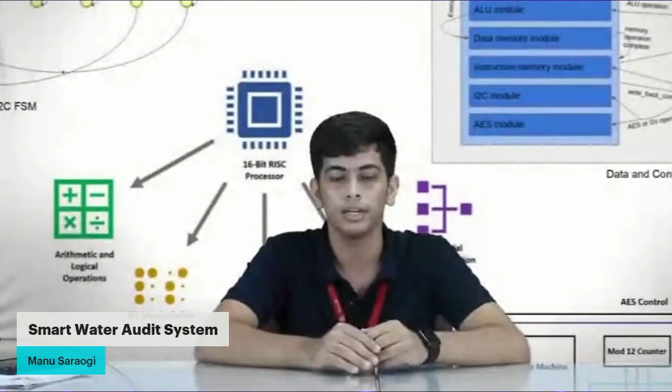The address of the slave which it wants to communicate with is sent on the SDA line, and the corresponding slave responds back with an acknowledgement bit. Once this is done, the read or write bit is sensed, and corresponding operation is performed by the master in cycles of 1 byte each. Once this is done, there's a stop condition also indicated by the master by pulling the SDA line high when the SCL is active, and this ends the communication.

With the advancements in IoT and artificial intelligence, smart cities is becoming a future. We, the team, have taken down the idea of water system distribution in a smart city.

In recent days, the audit system has been completely manual. We have certain pipelines laid down across the city, and detecting the pilferages or leakages is very tough since there's no proper communication between two different pipelines, as in where the leakage or pilferage is happening. Water being an important resource is something that needs to be conserved. So with this, we have set up a smart water audit system using IoT.

We have used four platforms for this: one being the ThingSpeak Cloud, other being the MIT App Inventor, wherein we could develop an app for the users to use. Then we have Firebase, which stores a database of all the users. And we have the Arduino IDE, through which we program our microcontrollers.

Coming to our block diagram, basically in a city we have a main water tank which supplies the entire city. The main water tank is connected to various houses via pipelines. We have equipped each pipeline with water flow sensors and a solenoid valve. Whenever the user needs a particular amount of water, he uses the app, enters the amount of water he requires, pays for that particular water, and then this data goes to the cloud.

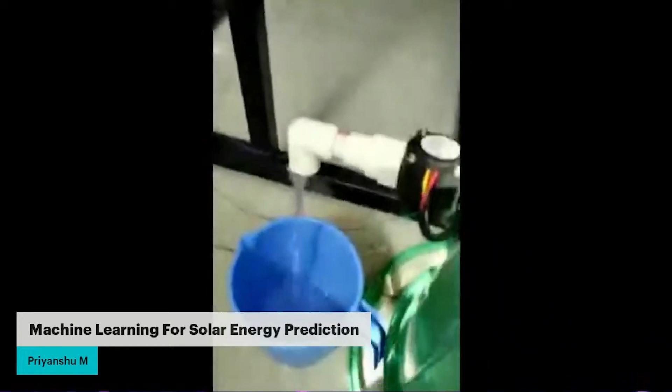As the water flows, the water flow meter present in the home tank and the main tank keeps recording the amount of water that's flowing and passes on the data to the cloud. Here we are seeing the concurrent data getting filled up at the home tank, and here we see the data being released from the main tank.

Once the amount requested reaches, the solenoid valve at the main tank and the home tank stops. So we have received around 620 ml of water.

As shown in the cloud, at the home tank we have received around 0.624 liters of water, and from the main tank, around 0.733 liters has come out. The difference in the water between the main tank and the home tank is due to the leakage between the pipes and the water that is still remaining in the pipeline. Thank you.

That was a lovely explanation, Priyanshu. I have a couple of questions for you. Am I audible?

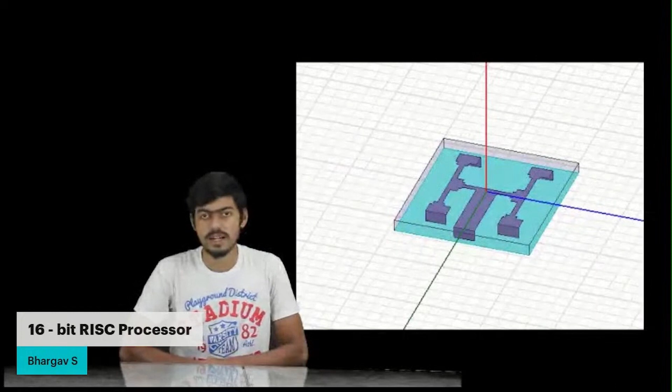So that was an introduction about the idea behind my startup, basically wireless power transmission. I've developed various antennas, phased arrays, and microstrip phased arrays for various different frequencies, mainly focusing on 2.4 gigahertz. I've also developed various rectenna circuits for microwave frequencies. The basic idea is to transmit electromagnetic waves and convert them to electricity. That's the basics of the project we've been working on for a few months now. Thank you.

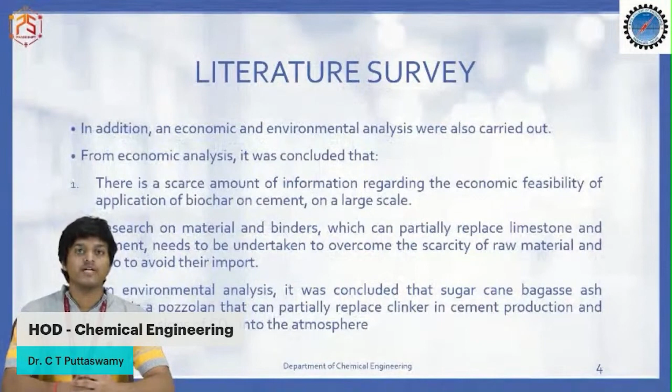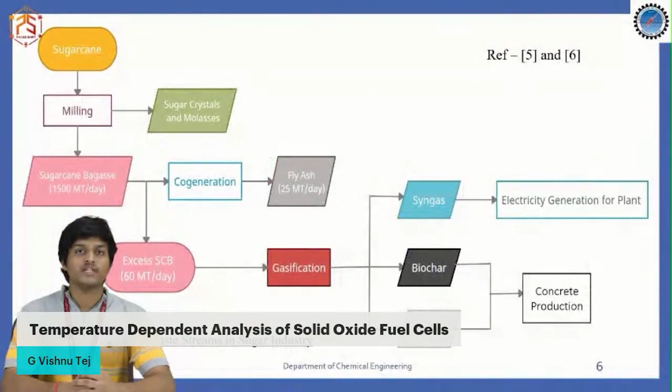Concrete is one of the most extensively used materials worldwide, but has a major negative impact due to the emission of carbon dioxide. Availability of surplus agro residues like sugarcane bagasse can be converted to biochar, which can be used as a concrete filler. This reduces the emission of carbon dioxide with less use of cement, and it also increases the quality by hydration and microstructure.

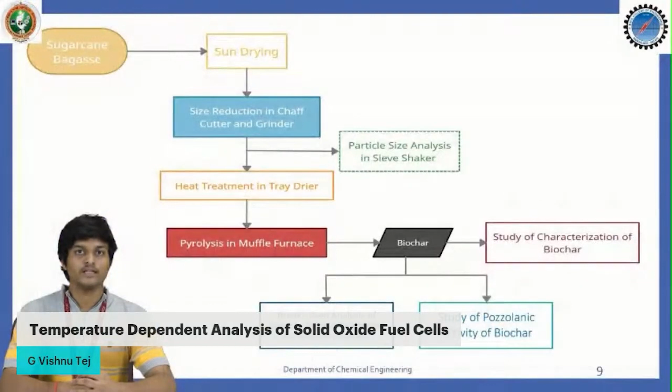The aim is to study the applicability of carbonized sugarcane bagasse in reinforced concrete. The objective is to prepare carbonized sugarcane bagasse and to study the characterization and pozzolanic activity of the biochar, and to perform the break-even analysis of sugarcane bagasse blended with concrete.

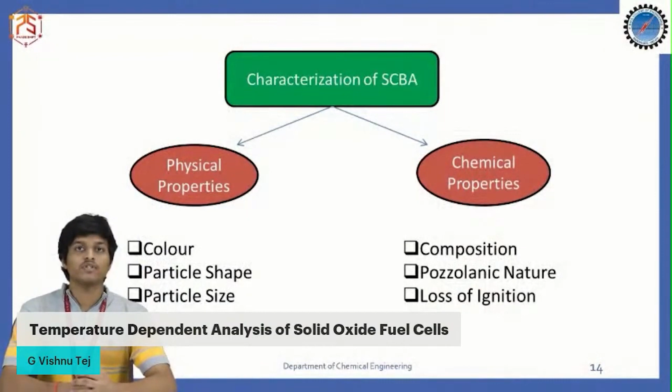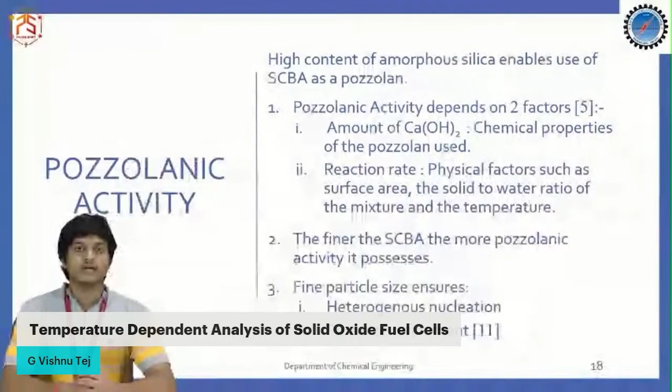The materials required are chaff cutter, grinder, hot air oven, muffle furnace, and sugarcane bagasse. The sugarcane bagasse is pre-treated before being sent to the muffle furnace. The pyrolysis takes place in the muffle furnace to produce the biochar. Simultaneously, the characterization and pozzolanic activity study of the biochar is held, and the biochar is mixed with reinforced concrete to study the break-even analysis.

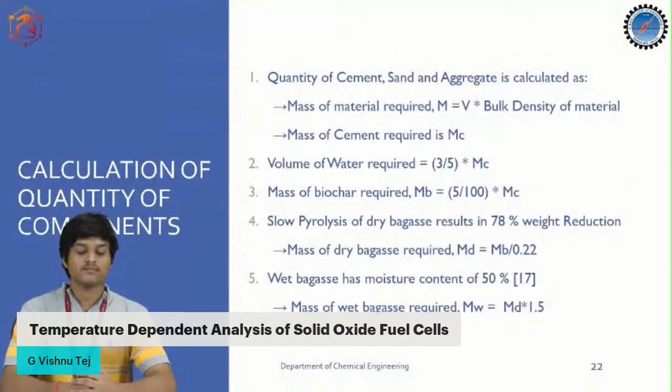The market price of M20 grade concrete is rupees 3,800 per meter cube. The operational cost is 30% of the total cost. The fixed capital cost is the sum of cost of mixing and the operational cost, which is again 30% of the total cost. The variable cost is the sum of purchase cost of cement, brick material, and filler material, plus the cost of biochar production.

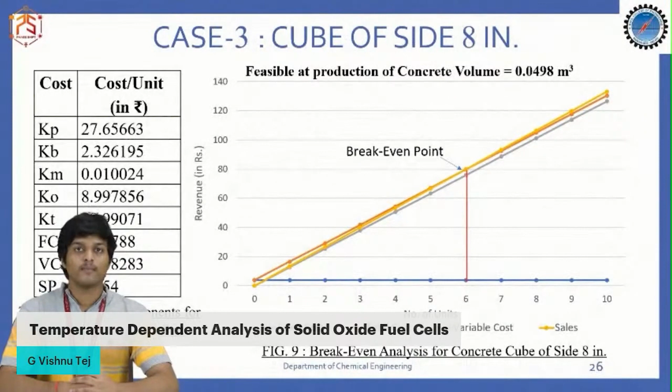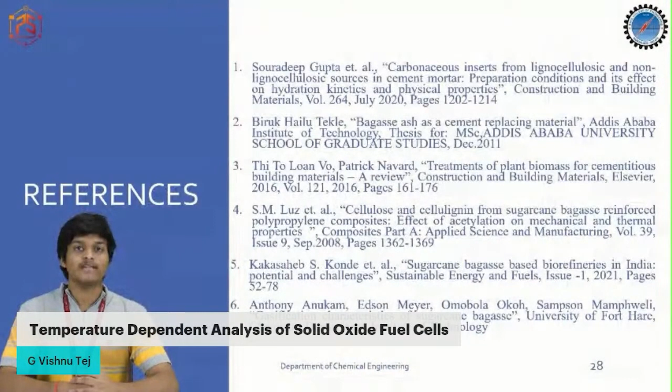In conclusion, necessary testing was done at a laboratory scale to obtain the biochar. Detailed study was carried out to show the bagasse char is suitable for concrete production. Bagasse is a class F pozzolan due to high silica content. Sugarcane has a high proportion of cellulose, hemicellulose, and lignin that influences the production of biochar. The break-even analysis was carried out to show economic feasibility of the process. Thank you.

Going on, thank you so much, that was a lovely explanation. We have Vishnu here who will be answering a few questions. Hi Vishnu, am I audible? Yeah, I can hear you. Can you hear me? Yes, I can.

So, any project that is done, we all know that we experience some kind of obstacles or failures as we are doing it. What would you say was the biggest obstacle you had to overcome as you were doing this project?

So, as our project involves solid oxide fuel cells, which is currently a developing technology, being students, we faced certain challenges in acquiring the software and doing literature survey because very little research has been done currently. The idea we had was to do temperature analysis, and very little research has been done in that particular aspect. So doing the literature survey, getting the relevant material, and acquiring the software were some of the major challenges we had. And then, of course, to analyze where we went wrong because it was a first-time project, introduced in the fifth semester for us. So those kinds of challenges we faced.

And how effectively do you think you overcame these challenges, and how did BMS help you do this? Yeah, so we are actually grateful to the chemical engineering curriculum for including mini projects into our scheme, because it was in our curriculum to do these kinds of projects, so we could make time to go ahead with it. We are really grateful to Dr. Samita Mehta ma'am for guiding us throughout the project, letting us know where we were going wrong and what could be done better. So because of implementation of this particular project in our scheme, we were able to do it better in the end.

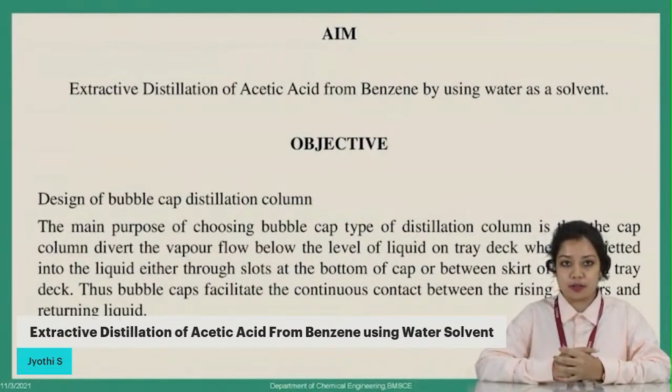Our flow sheet includes a mixer, two distillation columns, and a cooling tower. In the mixer, recycled solvent and fresh solvent are mixed, and along with it the feed mixture, which includes benzene and acetic acid, is sent to a distillation column.

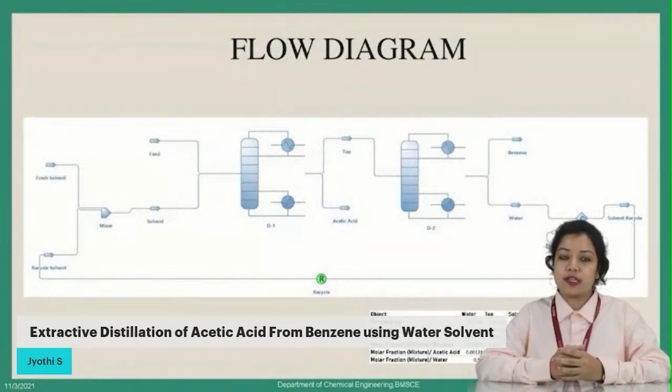The distillation column is equipment used to separate a mixture based on differences in relative volatility. Distillation columns have provisions for feed entry and removal of the top and bottom products. The section above the feed entry is called the enriching section, and the section below is called the stripping section.

Inside the tower there are a number of trays. There is a downcomer so that liquid flows from one tray to another, and a weir to hold the liquid at a certain height.

The feed, which is acetic acid and benzene mixture, when sent with water, has its relative volatility changed, so that the top product obtained is benzene and water, and the bottom product is acetic acid, which is removed from the bottom.

In this distillation column design, we made use of the McCabe-Thiele method to find the number of stages. The conventional method uses a handmade complicated graph, so to avoid such complications, we developed a method using an Excel sheet.

First, we draw a graph of mole fraction of the feed in the liquid phase versus the mole fraction in the vapor phase. We draw a 45-degree line as the operating line for total reflux, then an equilibrium curve using VLE data for the acetic acid and benzene mixture, obtained from the Perry's handbook.

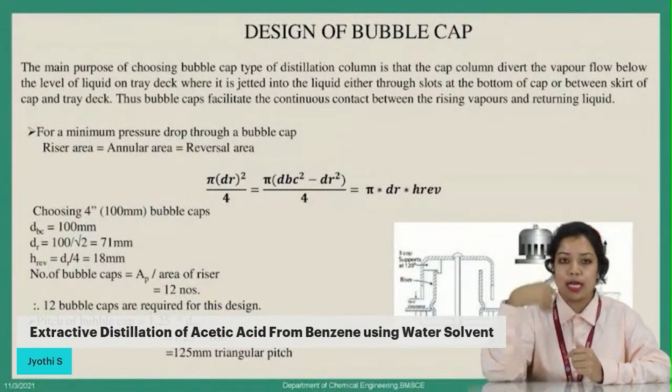From the second distillation column, the top product obtained is benzene, and the bottom product is water. In order to not waste the solvent, the water has to be recycled, and it is cooled using a cooling tower.

The water coming out of the distillation column is at a temperature of about 45 degrees Celsius, and we decide to cool it to 30 degrees Celsius. We employ a cooling tower for this.

The cooling tower is equipment used to reduce the temperature of water by countercurrent operation with air through the tower, packed with wooden slats. The air has a dry bulb temperature of 31 degrees Celsius and a wet bulb temperature of 22 degrees Celsius.

Hot water is sprayed from the top of the cooling tower using a distribution system, while air is passed countercurrently from the bottom. Since the density of air is much less than that of the incoming water, mass transfer takes place between the air and water, so the water rejects its heat to the air and is collected from the bottom.

The air, having become hot, is cooled to a lower temperature by employing a number of fans in the cooling tower, and then rejected to the atmosphere.

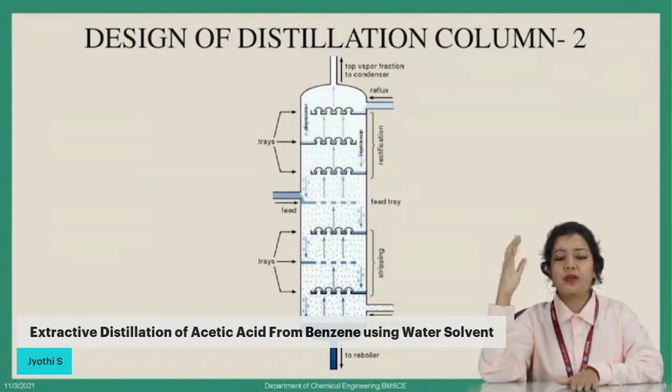Now, in order to find the dry air flow rate to be used and the packing height of the wooden slats, we make use of the graph of enthalpy versus temperature. Since the cooling temperature is 30, we draw a graph of temperature swinging between 25 to 45 with their respective enthalpies, formulated using psychrometric charts, so that we get an equilibrium curve.

We mark a point called Q at 30 degrees Celsius with its respective enthalpy and draw a tangent to the curve. The slope of the tangent will be equal to LC by G, where L is the liquid flow rate with which the water is coming, and C is the heat capacity of water, that is 4.187 kilojoule per kg Kelvin.

G is the minimum gas flow rate to be used. From this formula, we get the minimum air flow rate to be used, and the operating flow rate must be equal to 1.4 times the minimum.

Now, in order to find the height of packing, we make use of another point called P, marked on the tangent line Q, so that the tangent gets shifted away from the equilibrium curve, giving the operating line PQ and the equilibrium curve. We need to draw the tie lines between these two curves.

The slope of the tie lines is obtained by the formula slope equals h by k, where h is the heat transfer coefficient and k is the overall gas mass transfer coefficient. Since both h and k are known, the slope of the tie lines is obtained; it is equal to minus 11.4.

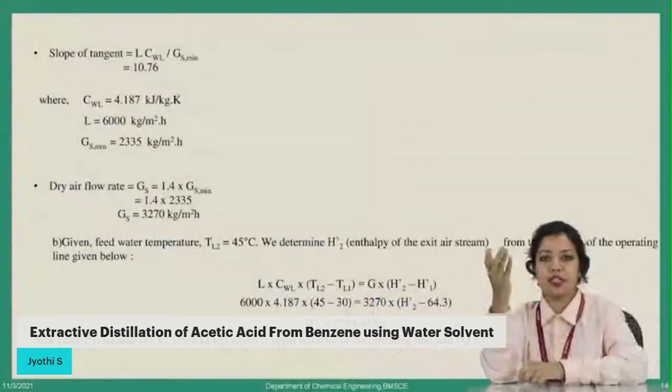And the two distillation columns which we have employed, the diameter comes around 1 meter and height comes around 3.5 to 3.8 meters, so that the design condition, that is h by d ratio must be equal to 4, is satisfied. So the design of the distillation column is satisfied, and the cooling tower design is also fulfilled.

So this is all about the simulation of the entire extractive distillation of acetic acid from benzene using water as a solvent.

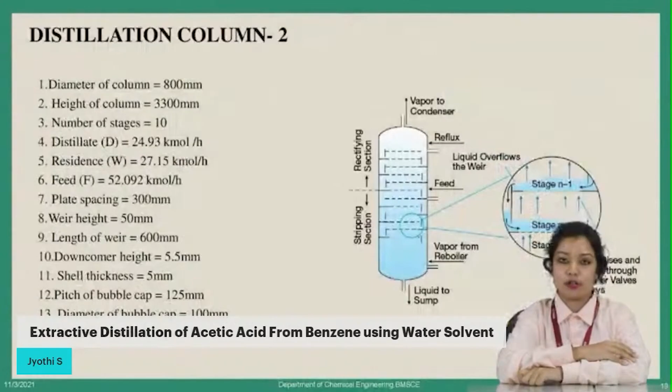That was a really, really informative project. I think we have Jyothi's teammate Rakshita over here who will be answering the questions. Am I audible?

Yes ma'am, you're audible. So as you know, chemical engineering is an extensive field, and it has a lot of elements to it. How would you help your juniors who would want to go into this field or do something similar to this?

Chemical engineering is a unique field in which we learn about the production of different kinds of chemicals, manufacturing, and also about the design of equipment. For my juniors, regarding our project, I would like to guide them about the simulation software which we used in our project.

DWSim is the software which we used, through which we can build the unit operations and solve the problem in an easy way. It is not possible for us to conduct all the chemical engineering experiments in reality.

Using simulation, the problem can be solved through computer or software when we put a set of scientific equations and get a workable solution. It is a great software through which we can solve problems.

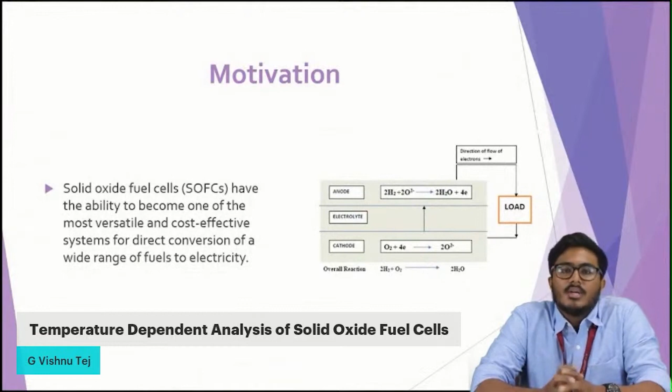Now I'd like to speak about our simulation part. To begin with, we created a 2D object in our ANSYS SpaceClaim software and extruded it to 3D.

Then we aim at transferring this CAD file to COMSOL Multiphysics software, wherein we do our entire simulation. Here we take this CAD file and assign the probe boundary conditions to it.

The probe boundary conditions include assigning the anode probe boundary conditions for hydrogen as fuel, the probe boundary conditions for oxygen as the other fuel, and proceeding with water formation at the end of the electrochemical reaction. The hydrogen-water probe boundary condition is assigned at the anode.

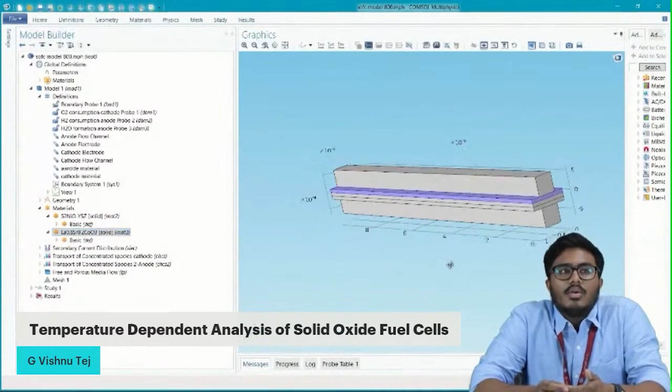Following this, after assigning the probe boundary conditions, we select the materials required for our study. We select nickel oxide based cermet as anode material, yttria stabilized zirconia for the electrolyte, and lanthanum strontium cobalt ferrite for the cathode. The choice of these materials was driven by our literature survey performed before.

After selecting the materials, we proceed with selecting the physics for modeling our simulation. It consists of three particular physics to be chosen. The secondary current distribution physics involves selecting the Butler-Volmer equations for charge transfer kinetic modeling in the anode, cathode, and electrolyte, because that's the most fundamental equation for modeling the same.

Then we go ahead with the transport of concentrated species, which involves the use of Maxwell-Stefan diffusion equations for modeling the flow of these species in the respective electrodes and the electrolyte.

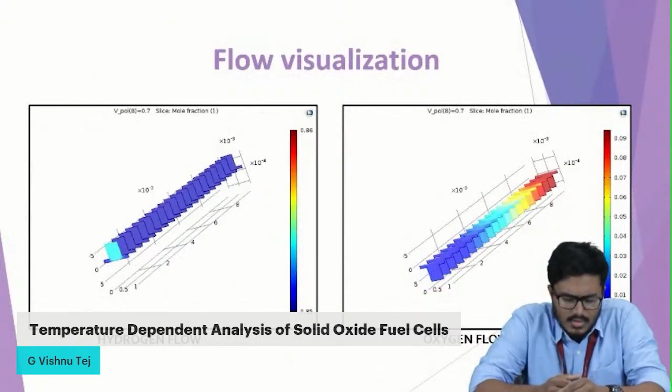Then we go for... wait one sec. Okay, so we first select the transport of concentrated species physics, wherein we are modeling the same.

We try to model the pressure fields and velocity fields in the electrodes and electrolytes using the Navier-Stokes equations and the Brinkman equations. Then the flow of the concentrated species in the electrodes and electrolytes is modeled by means of the Maxwell-Stefan diffusion equation.

After these physics are selected, we aim at meshing our model, which is normal meshing done here for finite element analysis to obtain the results.

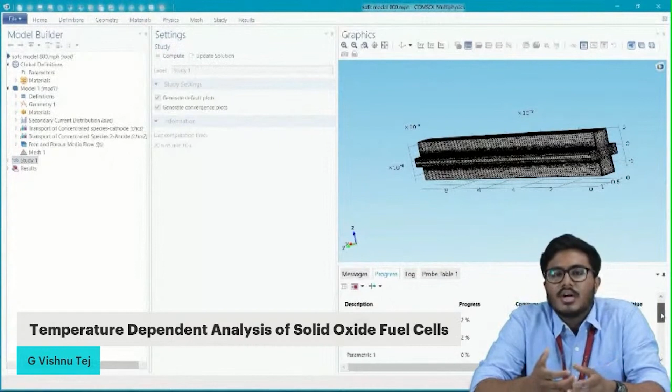After meshing has been done, we go to the study mode, wherein the computer requires setting certain parameters. Majority of the parameters are set based on the literature survey, with temperature being the only variable parameter for our studies, which will be shown later in the results section.

After these parameters have been set up for the study mode, the simulation is started. As you can see here, the simulation is being run. It takes some time to occur, and after a period of time, the results are obtained.

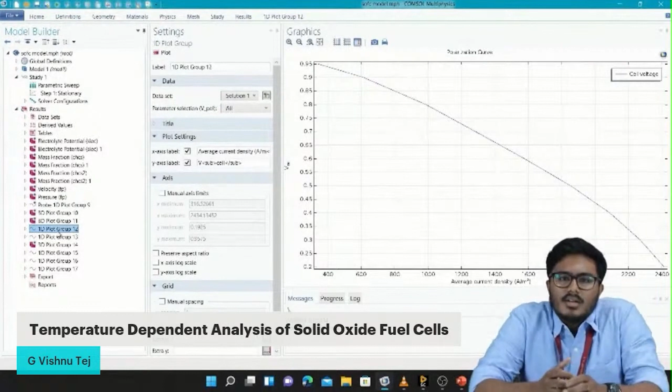Under results, we will bifurcate them into two segments: one which talks about the polarization characteristics, and the other which talks about the power characteristics. First, I'll speak about the polarization characteristics.

There are four curves obtained, at 500, 800, 1000, and 1200 degrees centigrade. We can see that as you increase the operating temperature of the SOFC, the performance increases, in that the polarization voltage required for operation is lower at higher temperature. Next, we'll talk about the power characteristics.

I'd like to conclude that throughout our simulation studies, we found that overall performance of the SOFC increases with increase in temperature. As a further study, we could also be interested in trying different materials out so that we can work on bringing down the operating temperature of the SOFC. Thank you.

Thank you, Vishnu, for the project presentation. I think we have Vishnu here. Yeah, am I audible? Yeah, yeah. Okay, thank you. So I have two questions for you. The first one is, what was your motivation, or what did you think before starting this project?

As we can see, currently the entire focus is shifting from exhaustion of fossil fuels to getting a more sustainable alternative. Even the recent coal crisis of India points towards the same. Keeping these things in mind, we thought the future is renewables, and solid oxide fuel cells are one of the most versatile fuel cells because they can take in a wide variety of fuels and convert them into energy, making them an even better alternative to current energy demands.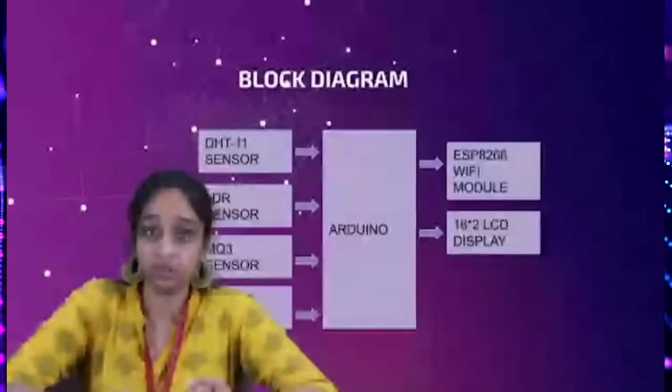Our project is food quality detection and monitoring. More than 50% of the food gets thrown away to landfills because of wastage or improper maintenance. To stop this and also to stop hunger, we've engineered and designed this system. This can be implemented in airplanes while exporting food, in warehouses, storages, and also in malls to extend the shelf life of the food.

Basically, we've used three main sensors to detect the food quality: the DHT11 sensor, MQ3 sensor, and LDR sensor. DHT11 is a temperature and humidity sensor, MQ3 sensor detects foul gases from ethanol and alcoholic smells, and LDR is a light sensor that detects ambient light.

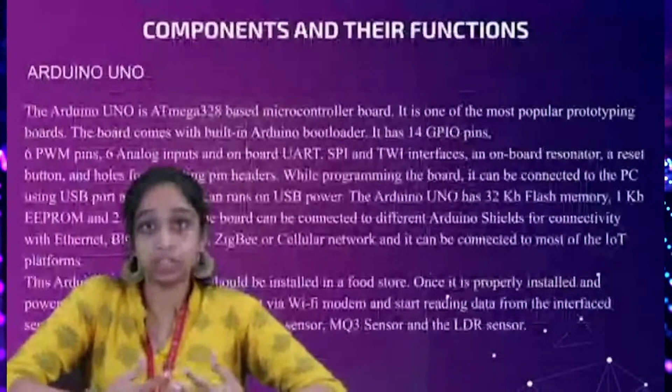This food quality detection system will help in detecting if the food is spoiled or not, and will also help us in monitoring the environment. For example, when there is a rotten apple along with good apples in a basket, the MQ3 sensor detects the smell and shows the food is spoiled. We get a message saying abnormal smell, and we can remove that one apple instead of letting all the apples get spoiled.

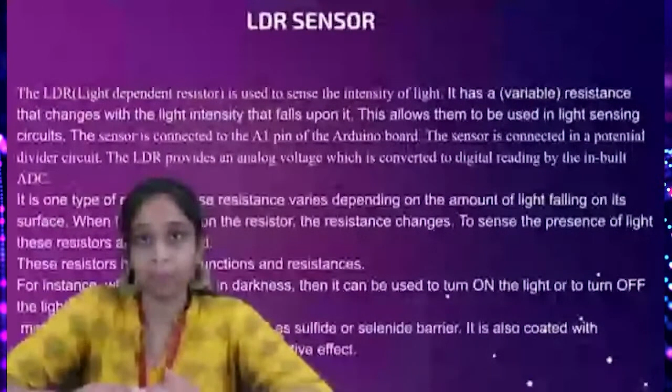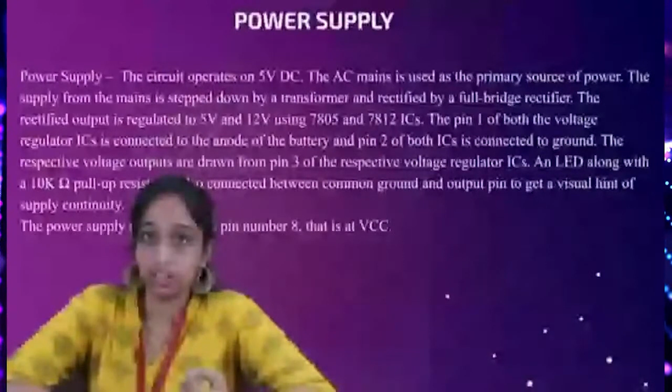Similarly, we have other parameters also, such as light. When there is abnormal lighting, that is when light is out of the range specified by us, or also the temperature and humidity is out of range of the system, it will help us monitor the environment by increasing the temperature or decreasing the lighting. If there is too much lighting in the environment, the chances of food getting overripe also increases.

We have used an IoT setup. For the software part, we have used Arduino, and we have programmed using C programming in the Arduino. We have also used IoT with ThingSpeak. Then our food quality system detects...

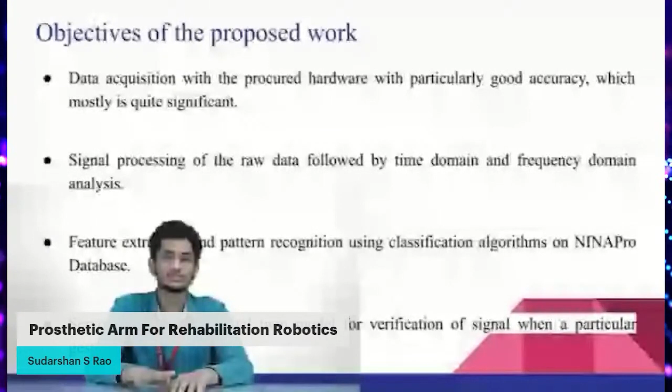The scope of our project is to provide a cost-effective prosthetic arm to all amputees. We verified an existing system called Skull Arm, developed by a Hyderabad institute, which is a lightweight 3D printed bionic arm. It cost around 35 lakh rupees.

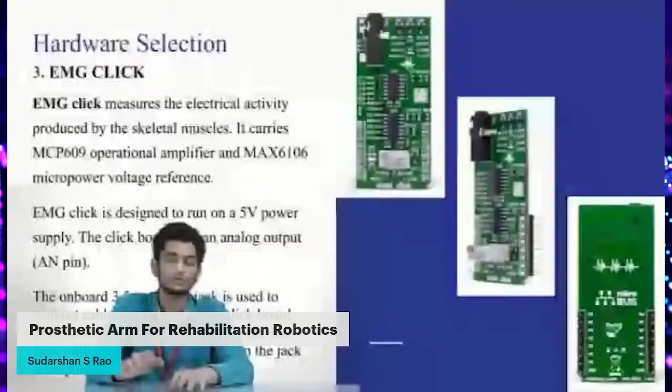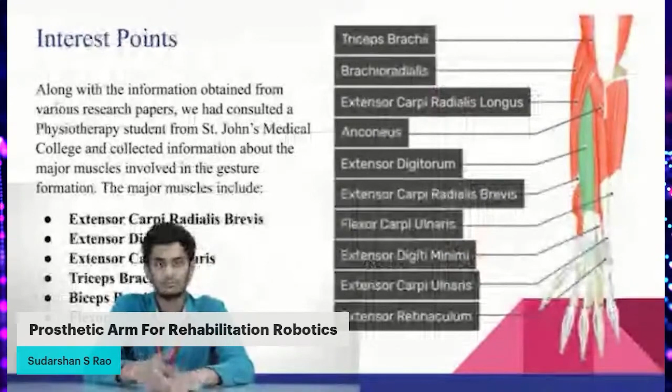So if we wanted to create a cost-effective solution for this, we aimed at replicating the same results provided by the Hyderabad bionic arm. Coming to the hardware implementation, first we analyzed an online repository to figure out what kind of data we are dealing with, because we are working with a human hand, where safety is the imperative factor in the system.

We took the data from an online repository and applied a lot of classification algorithms on RStudio. We got 91% accuracy with KNN, that is K nearest neighbors algorithm. We also used K-means, but received only 89% accuracy. Although K-means was faster than KNN since our dataset was small, we got better accuracy with KNN, so we used the KNN classification algorithm.

Later, we realized that data exists in both time domain and frequency domain. Coming to the servo motors part, we attached several electrodes on the right arm. The electrodes are basically used for EMG, that is electromyography. Electromyography basically produces a waveform when there is a movement in the hand's muscle.

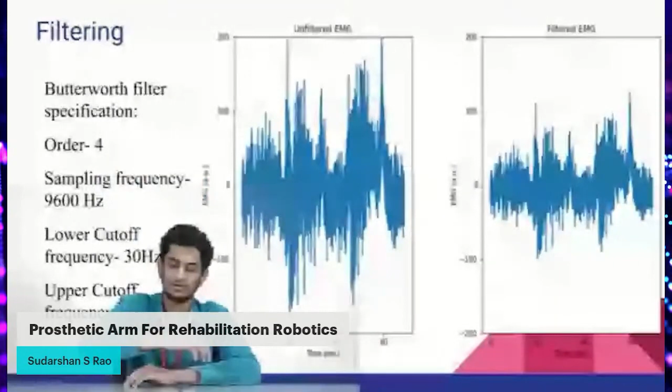We also used the EMG clip. The EMG clip is basically used for signal conditioning. It had two RC filters to remove any noise from the signals, and it also had an amplifier to amplify the signal, because the output of any EMG will be in millivolts. We had to amplify it to volts.

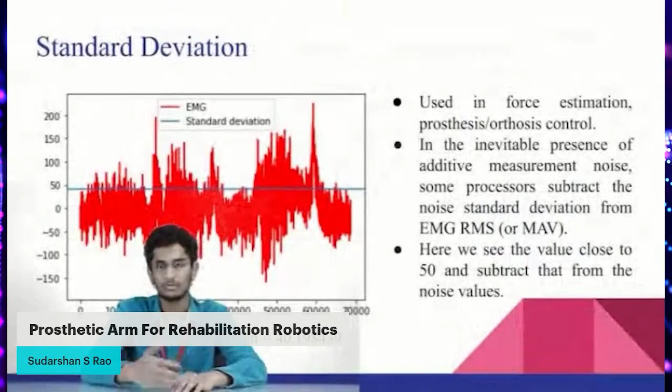After amplification, we passed it to a comparator, where the comparator compared the dataset to a threshold value, so that we reject all the unnecessary values and take only the values which were required for our experiment.

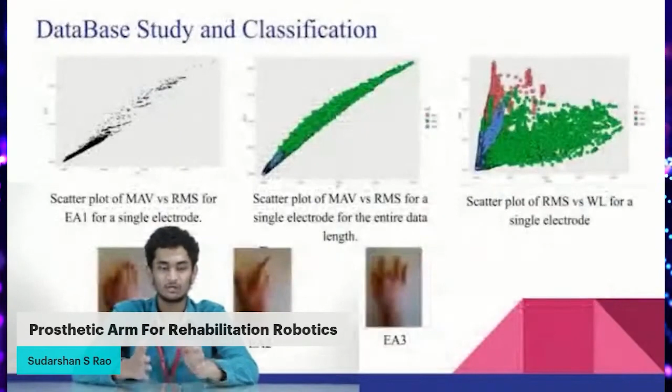On MATLAB, we compared the coefficients of our datasets to get a smooth bell curved graph, because when we took the raw data and plotted the graph, it was very skewed. We wanted a perfect bell shaped graph, so we did that.

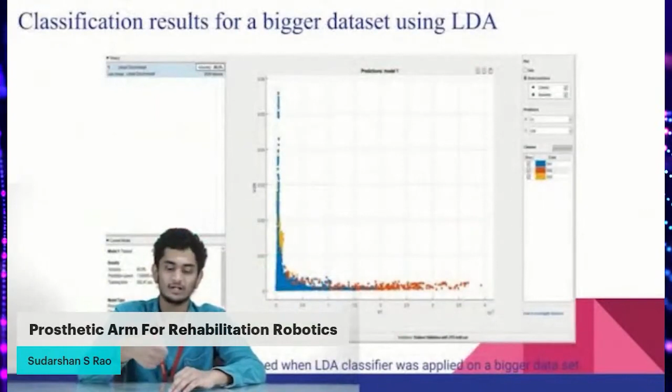Later we gave a PWM, that is pulse width modulation, input to the servo motor, so that it can replicate the exact movement of the wrist, and we achieved a very good output with the servo motors. But unfortunately due to COVID and less time, we couldn't do it for the entire arm. We just used the wrist motor.

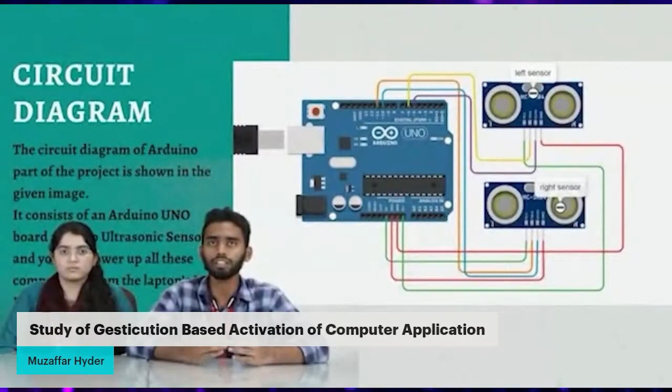The ultrasonic sensors will be connected to either end of the laptop, then connected to the Arduino, and the Arduino is connected to the laptop. The ultrasonic sensor senses the distance of the hand from it, which is calculated using Arduino and sent to the laptop using the PySerial library. In the laptop, using a Python graphical user interface, the hand gestures are converted to keyboard, mouse and click actions.

We have implemented this project using two computer applications: web browser and VLC media player. There are various gestures included in our project. Suppose we keep our hand in front of the right ultrasonic sensor and move it away or towards the sensor, it will lead to scrolling up and scrolling down in the web page.

Similarly, when we keep our hand in front of the left ultrasonic sensor and move it towards or away from the sensor, it will lead to volume up and volume down in VLC player. When we swipe our hand right or left, it will lead to next tab or previous tab. For playing and pausing the video, we need to keep both hands in front of both sensors.

This project is mainly used to solve the problem of traditional HMI devices like a mouse, which usually require a surface to operate on. Since these surfaces may not be available always and cannot work on rough surfaces, using gestures to control the computer application makes it easier compared to that.

It can be used while doing presentations or in teaching, where teachers have to continuously change slides while teaching in class. It can also be used for gaming applications. Thank you.

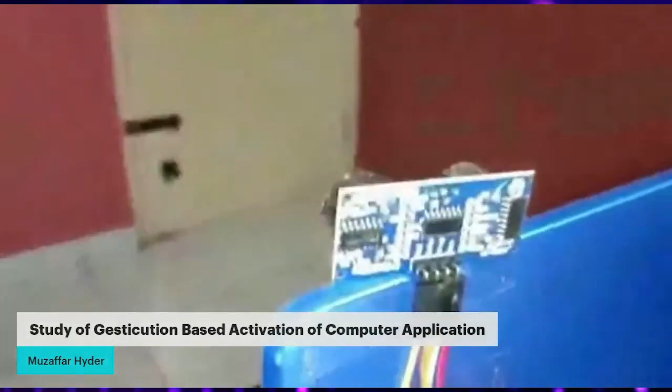This is the Arduino Uno. The trig and echo pin of sensor 1 is connected to pin 2 and 3, and trig and echo pin of sensor 2 is connected to 6 and 5 of the Arduino. The Arduino code is uploaded and the Python code is left running in the background.

First, we'll be performing actions in the web browser. For changing to the next tab, we need to swipe our hand in front of the right ultrasonic sensor. For going back to the previous tab, we need to swipe our hand in front of the left ultrasonic sensor.

For scrolling up the web page, we need to place our hand in front of the right ultrasonic sensor and move it towards the sensor. For scrolling down the web page, we need to place our hand in front of the right ultrasonic sensor and move it away from the sensor.

Now let us look at the actions performed in VLC player. To play the video, place both of your hands in front of both the ultrasonic sensors. To pause the video, again place both the hands in front of both the sensors.

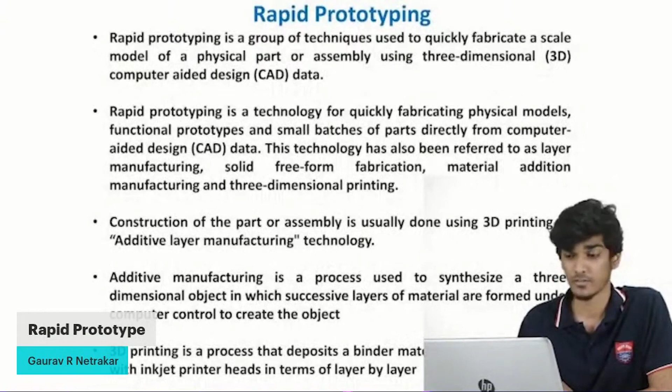This is rapid prototyping. Rapid prototyping is a group of techniques used to quickly fabricate objects using 3D images converted into CAD data. Rapid prototyping is also referred to as layer manufacturing, or material addition.

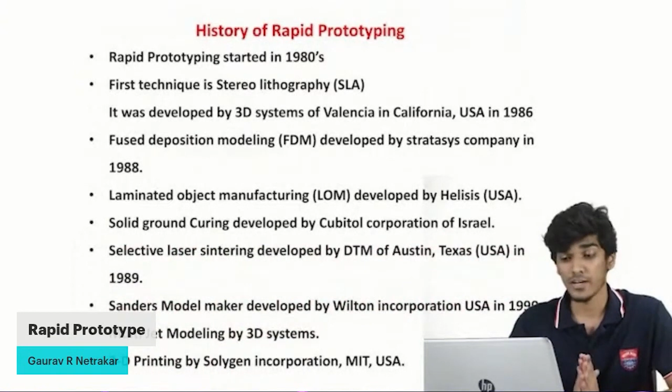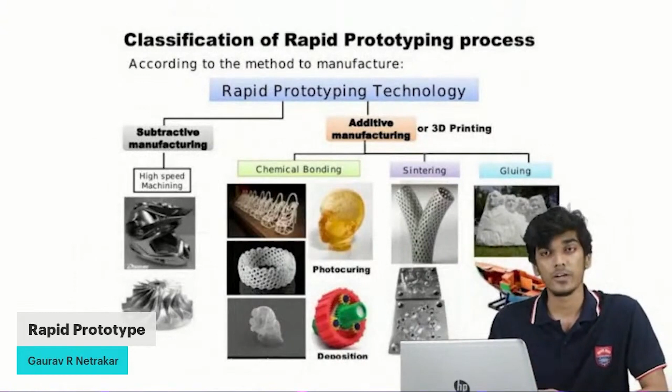Basically, there are two types of manufacturing. First one is additive manufacturing, which is layer by layer manufacturing, and subtractive manufacturing is subtracting the materials layer by layer.

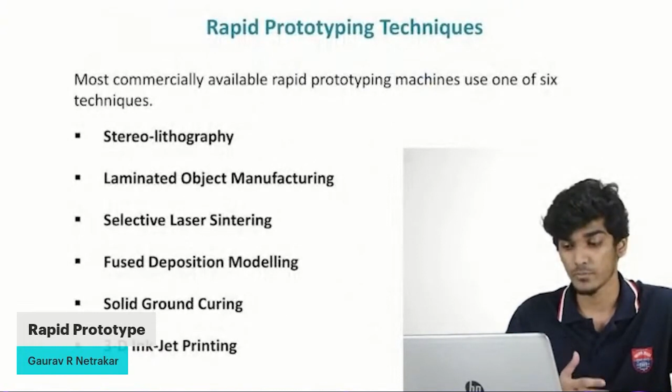There are more types of techniques in rapid prototyping. First one is SLA, which is stereolithography, and laminated object manufacturing, selective laser sintering, fused deposition modeling, solid ground curing, and 3D inkjetting.

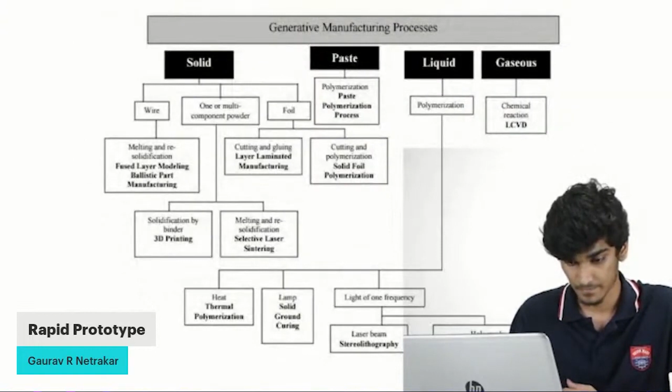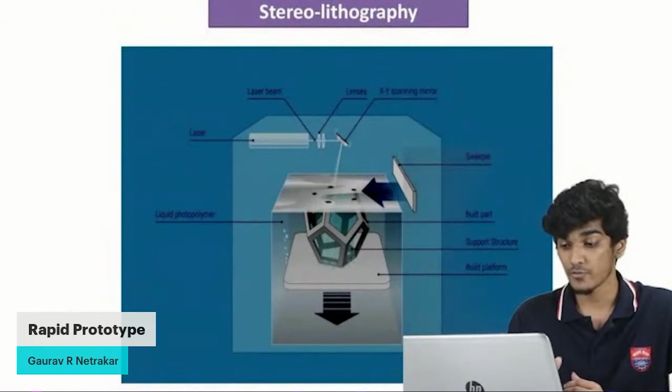Coming to the first, SLA, which is stereolithography. Stereolithography is a laser-based rapid prototyping process which builds parts directly from CAD by curing or hardening a photosensitive resin with a relatively low power laser.

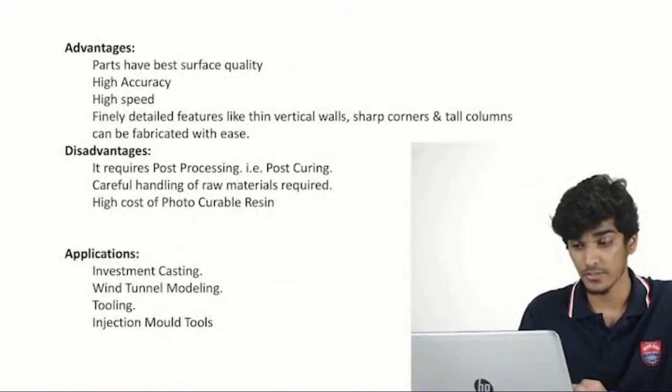Coming to advantages of stereolithography: parts have the best surface quality, high accuracy, and high speed. Finely detailed features like thin vertical walls can be seen. Applications are investment casting, wind tunnel modeling, tooling, and injection mold tools.

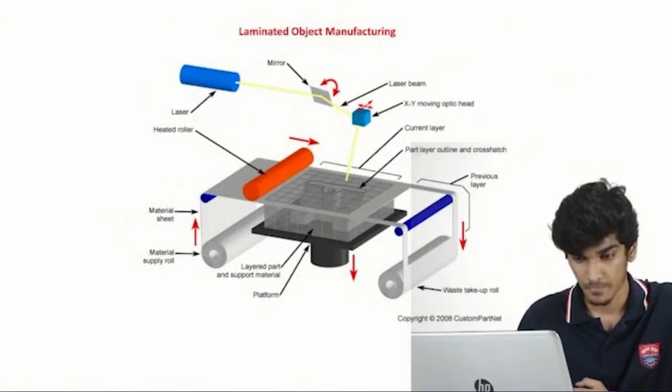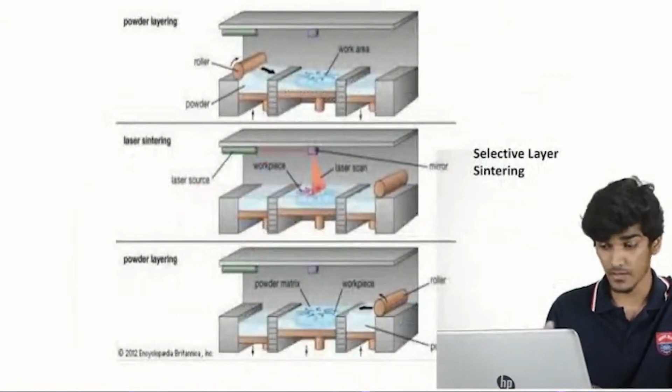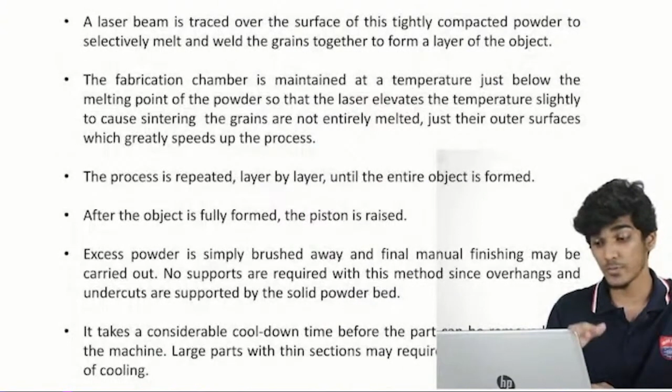As the nozzle is moved over the table in the required geometry, it deposits a thin bead of extruded plastic to form each layer, layer by layer.

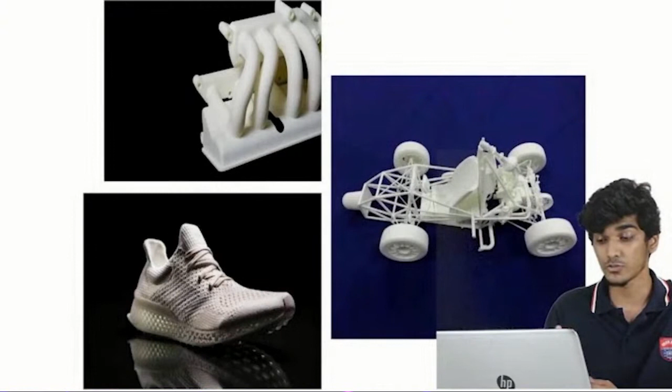This plastic hardens immediately after being squirted from the nozzle and bonds to the layer below. The object below is on a mechanical stage which moves vertically downward layer by layer as the part is formed. The entire system is contained within a chamber held at a temperature just below the melting point of the plastic.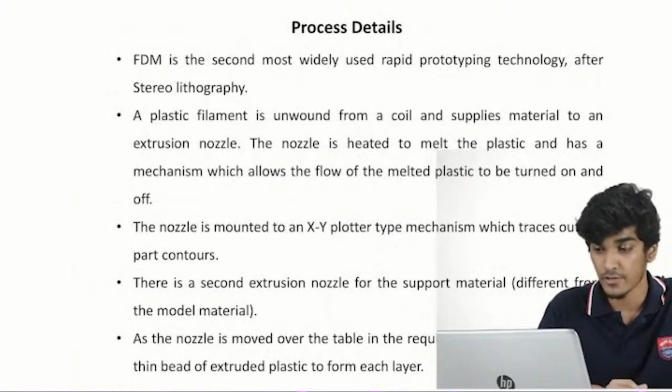So, advantages of FDM: it can reduce lead time and poor dimensional accuracy associated with traditional pattern making. The process is accurate to within 0.005 inches.

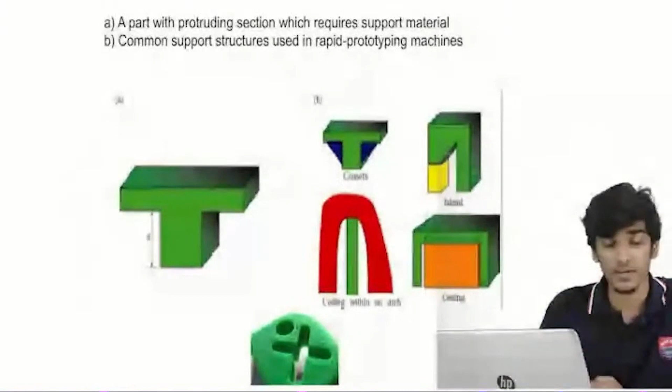Every system has a limitation, so FDM also has its own limitations: sharp features or corners are not possible to get, part strength is weak perpendicular to the build axis, and more area in slices requires longer build times.

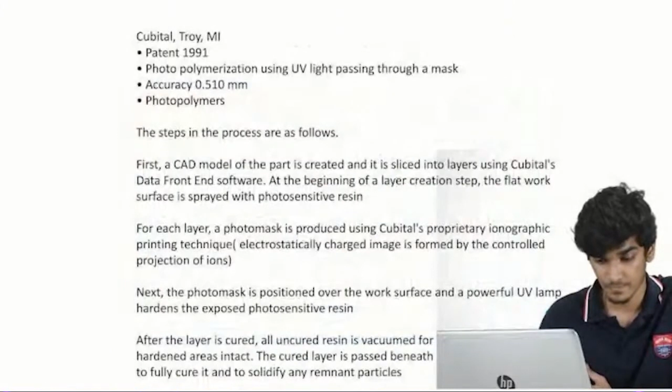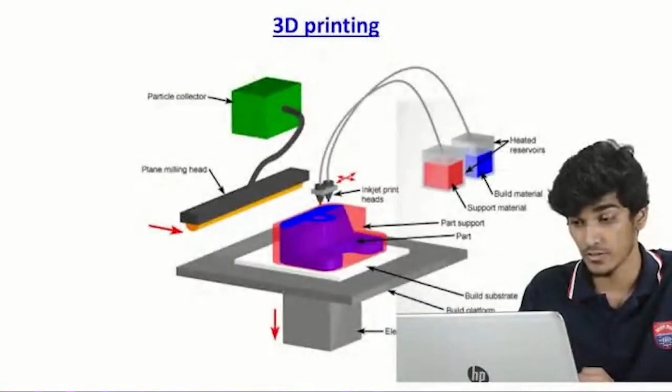3D inkjet printing: unlike the other techniques above, inkjet printing refers to an entire class of machines that employ inkjet technology. The first was 3D printing, developed at MIT and licensed to Soligen Corporation. That's about 3D inkjet printing.

Solid Ground Curing (SGC) was developed by Cubital Limited, jointly owned by Scitex Corporation and Clal Electronic Industries. In this process, photosensitive resin is first sprayed on the build platform. Next, the machine develops a photo mask of the layer to be built. The photo mask is printed on a glass plate above the build platform using an electrostatic process like that found in photocopiers.

The next and last process is laminated object manufacturing. In this process, a laser cuts slices from a sheet of paper which is then attached to previously cut layers. Unlike other processes, only the outline of the shape needs to be cut. Areas that are to be internal free space in the final model are finely cross-hatched by the laser, producing a collection of small cubes in the final model.

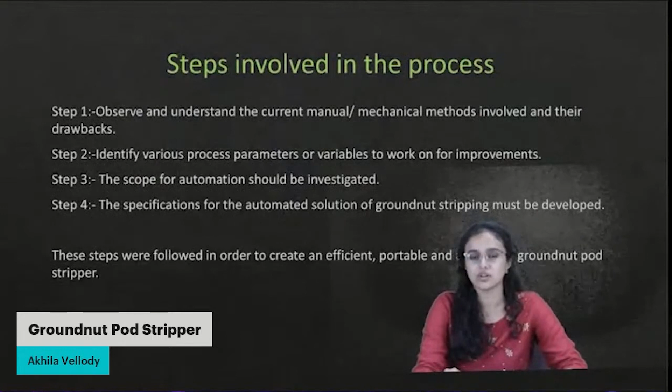Groundnut production in India is done at a very large scale, and groundnuts are one of India's most important crops. Most groundnut production happens amongst small and medium scale farmers, who are unable to afford the equipment for this process. It's done manually most of the time, which makes it very time consuming and requires a large amount of labor. This increases expenditure among farmers and decreases efficiency as well as revenue.

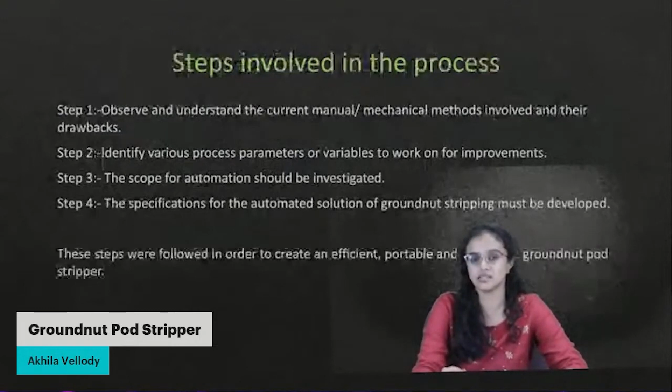So this project aims to rectify this problem among small and medium scale farmers and create a groundnut stripper that will work at lower operation cost. A brief introduction on what stripping of the groundnut pod is: the process of separation of the groundnut takes place after the harvesting and drying of the crop.

The objectives of this project were to increase overall productivity, to increase efficiency, and to make sure that the stripping of the groundnut pod was done in an efficient and effective manner.

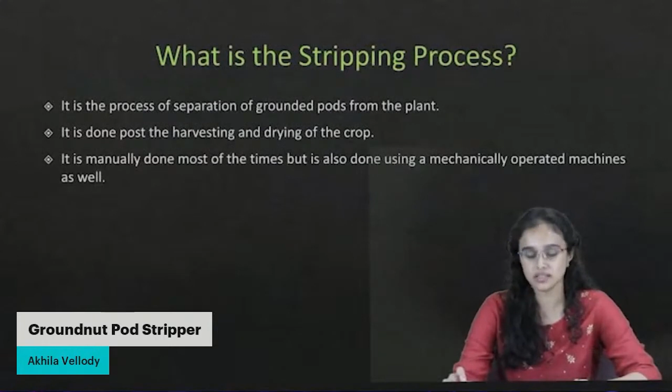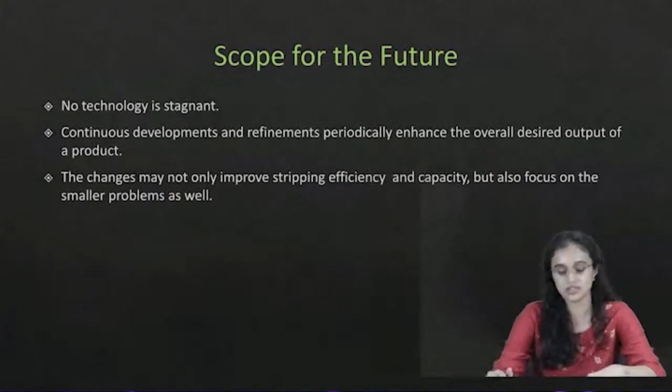The first step was to observe, understand, and interpret the drawbacks involved in the process of stripping the groundnut. The next step involved processing the various parameters and working on an efficient solution to identify various process parameters or variables and work on them for improvement.

The specifications of the automated solution for groundnut stripping would then be developed: an efficient, portable, and affordable groundnut pod stripper.

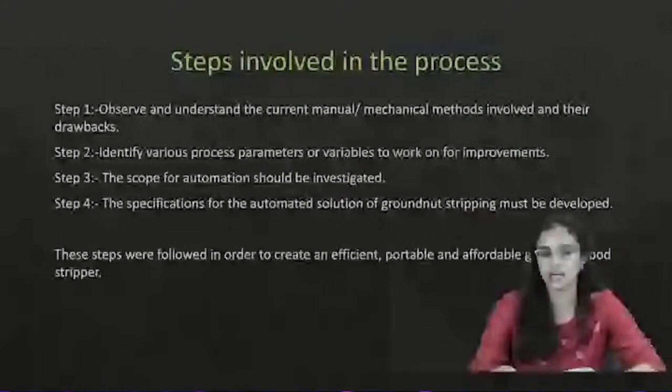This mechanism proved a high degree of efficiency, and the conclusion derived was that the morale of the farmers was high and the operating cost was very low. Most of the objectives were achieved, and there is a lot of scope for improvement.

Technology is never constant, and there can always be refinements and improvements made in terms of the capability and stripping efficiency in the groundnut stripping pod model. Thank you.

Hello everyone, myself Rahul, Assistant Professor, Department of Mathematics. We would like to present an algorithm called singular value decomposition in face recognition.

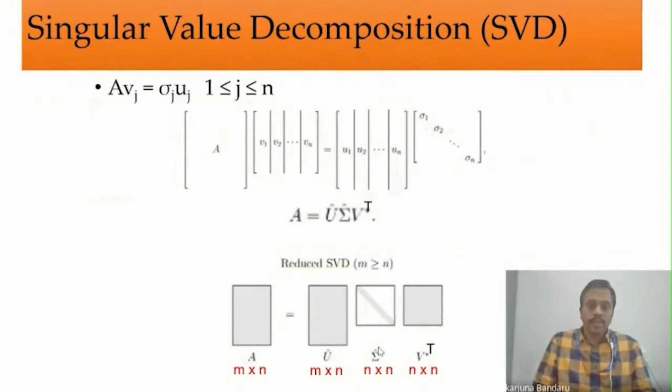First, we will see what is singular value decomposition mathematically. A matrix A can be decomposed into three matrices, written as the product U, sigma, V transpose. U contains eigenvectors, sigma contains singular values in decreasing order, and V contains orthogonal vectors. These are the dimensions for matrix A, U, sigma, and V.

The procedure is, first we need to find the eigenvalues and eigenvectors for A transpose A, and then comes the singular values, that will be the matrix sigma. Singular values are nothing but the square root of eigenvalues, and then we have to find orthogonal vectors using the Gram-Schmidt orthogonalization process.

Now the problem is how this algorithm is used in face recognition. So what we have done here is, we have considered 5 personalities: Abdul Kalam, Kamal Hassan, Aishwarya Rai, Rahul Dravid, and Virender Sehwag. There is a database containing 25 images total of all these personalities, each with 5 different images in different orientations.

So the main problem is, if someone gives a new image, the database should compare the new image with all these images and give the correct image as the output. That is what the problem is all about. And the algorithm we are going to use is singular value decomposition.

As we know, each image can be represented in the form of a matrix. So the first step is, we represent the images in the form of a matrix of dimension 9600 cross 25, because there are 25 images and there will be 9600 rows.

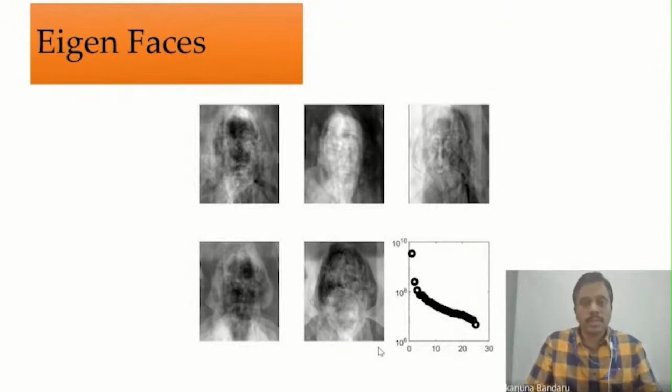You can easily get the template by using inner product space. For example, to find the template for Dravid, you consider the inner product of Dravid with the first eigenvector, similarly the inner product of Dravid with the second eigenvector, and so on.